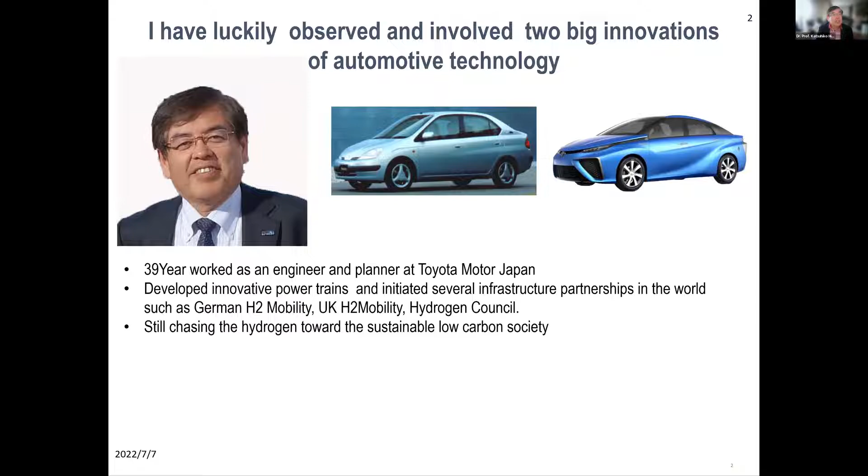Yes, we can. Thank you very much for the introduction, it's a great honor to talk on this topic. As I said, I've been working for years in the automotive sector and also in hydrogen, so I'm still chasing hydrogen toward a sustainable low carbon society. Our goal is not just a decarbonized society or handling the issue of climate change - our goal is a sustainable life. Today's topic is what's going on in Japan, especially for the transport and energy sectors.

Japan's effort for hydrogen is already more than 30 years old, in early stage energy sector and also local emissions - that was a problem especially for a big city like Tokyo. But now, actually, most emissions are not from transport. So vehicle emissions are not very important for Japan to solve the local emission problem. Now the target is changing because hydrogen will be a very important vector for a carbon neutral society and also the green growth strategy.

Historically, Japan led the world in adopting a hydrogen strategy. In 2017, Japan was the only country to have a hydrogen strategy. Now we have many, especially after 2020-21, and even now we have a hydrogen strategy for Saudi Arabia. That's a little bit surprising, but it's because hydrogen is very important all over the world.

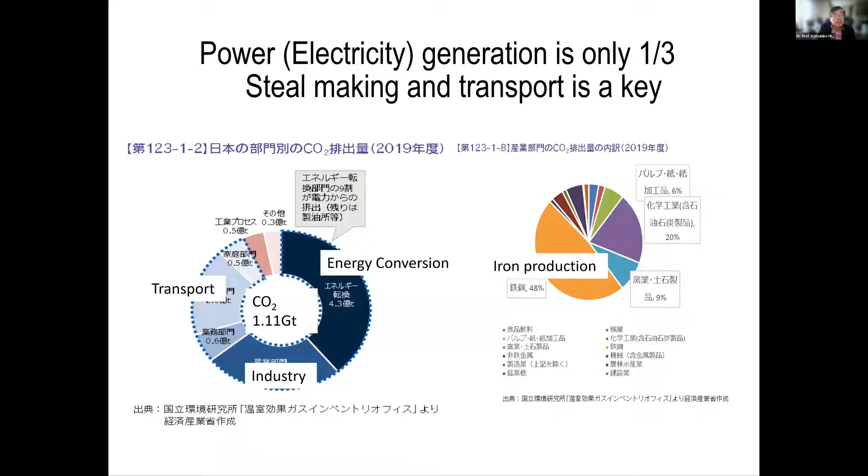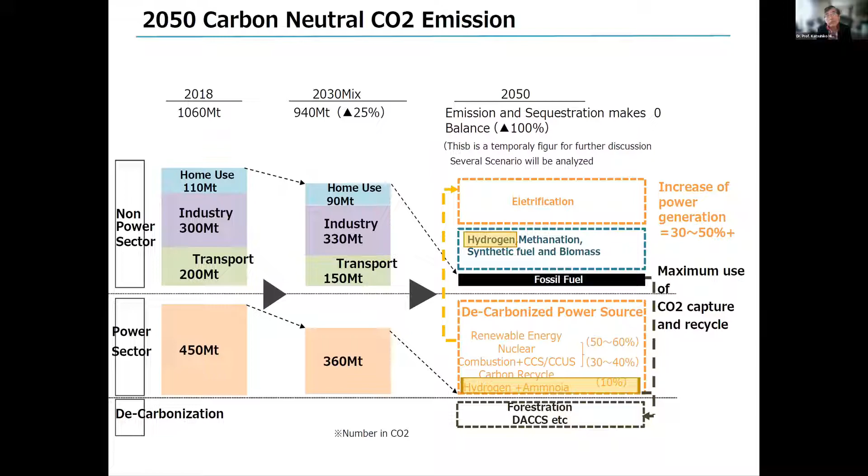This is the carbon neutral strategy of Japan. Currently more than 1 gigaton of carbon dioxide emissions need to go down to 0 by 2050. Japan set the policy first to reduce the cost of hydrogen, then showed a moderate target. But last year, because of carbon neutrality commitments, they set a higher target - but still, compared with Europe and the rest of the world, it's still moderate.

Already for passenger cars, hydrogen price at the hydrogen fuel station is at parity. But to go beyond this, the hydrogen cost needs to be cut further. So this was something the Japanese government used as a strategy.

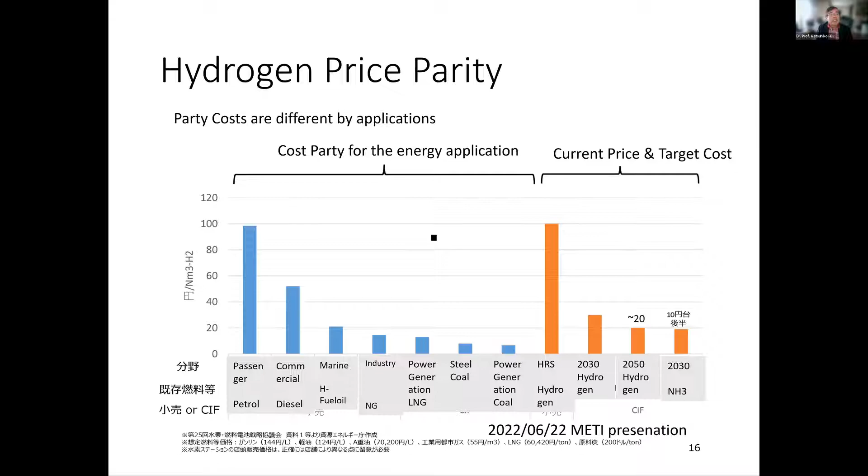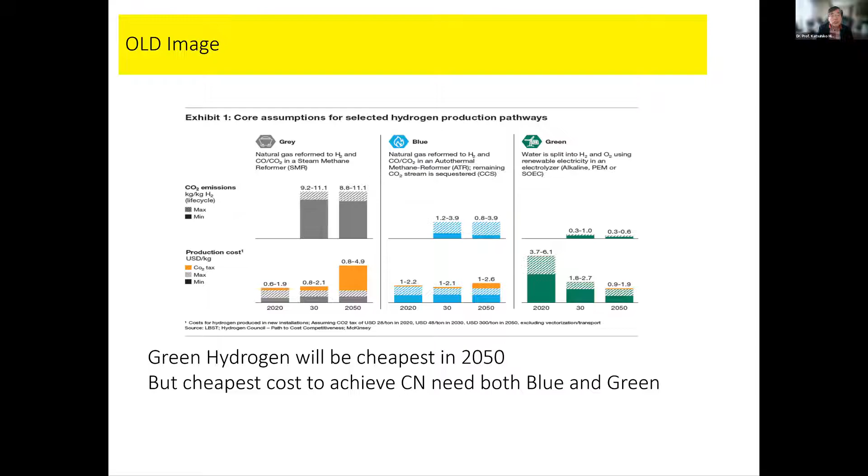But Europe now, natural gas is 167 euro per megawatt hour. That is something like $50 per million BTU. So the equivalent hydrogen price is $6.5. So green hydrogen is already near this figure.

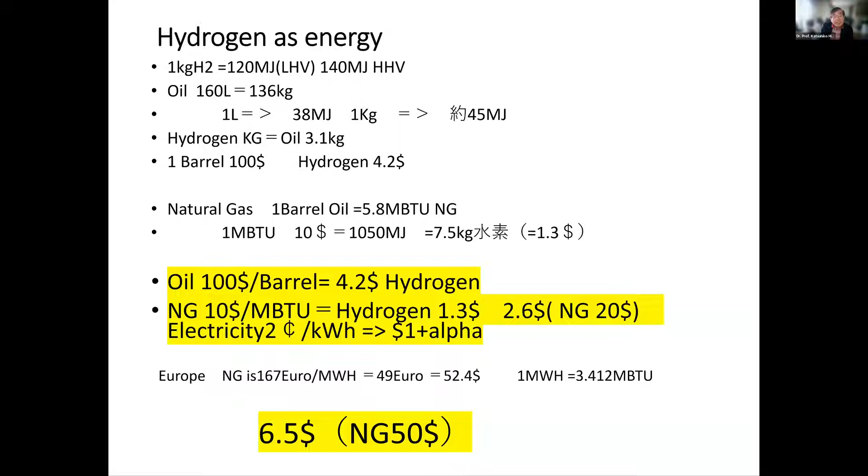On the right is green hydrogen. Green hydrogen is currently more expensive than fossil fuel. Actually, this was when oil was $60 per barrel. With oil at $120 per barrel, with CCS, blue hydrogen is almost the same, or maybe a little more expensive at this moment. But if you see the real value chain of this, the concession is more than half of those costs.

That means when we pay the cash, half the money, or actually two thirds of the money, is not going into the normal economy, like creating jobs or other investment. But in the case of green hydrogen, this is completely different, because the energy comes from PV, wind, and other renewables, and electrolyzers. The cost can be a bit more, but cost means cash flow, and that cash flow will be redelivered to the industry. So economic cost can be better for green hydrogen.

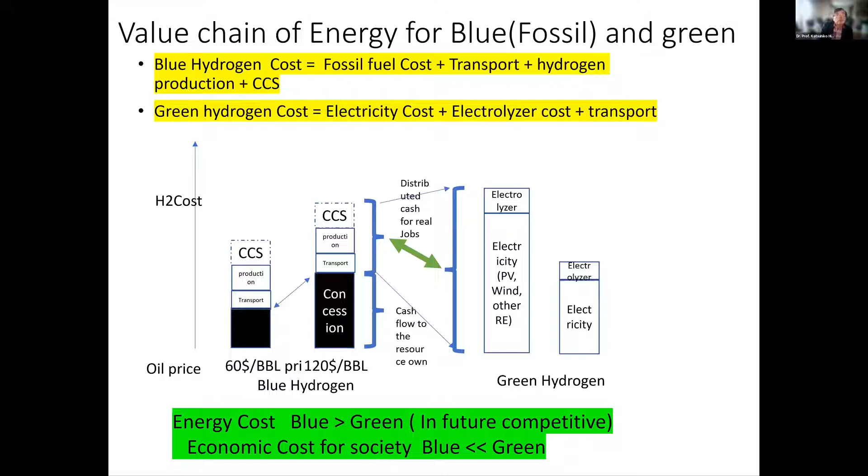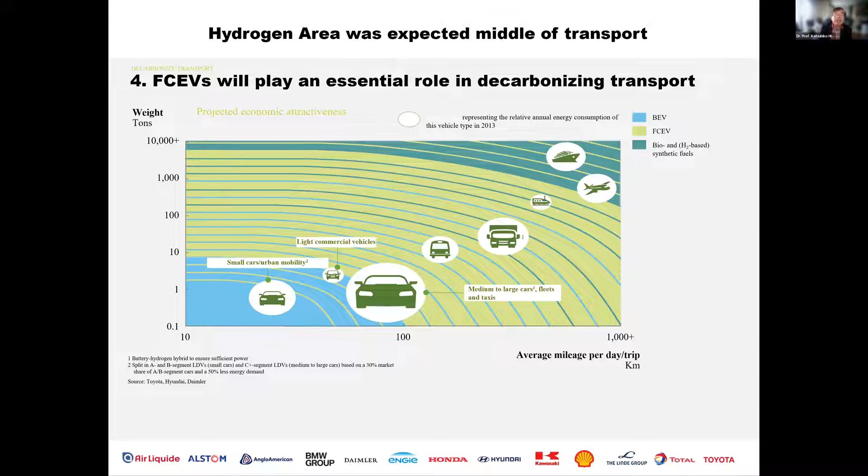So battery or fuel cell is always being discussed. This is a picture I drew during the Hydrogen Council. Smaller cars will be battery electric, longer distance and larger vehicles will be hydrogen. Aviation and ships are a little uncertain. But a very important thing is the distribution of carbon dioxide emissions. Actually, small vehicles are high in number, but the carbon dioxide emission is not so large.

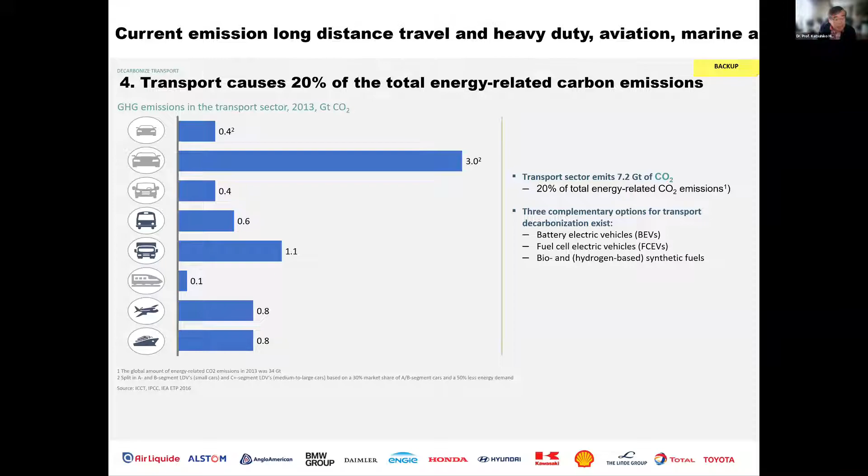So this is the current status of vehicle trends in the world. Small passenger vehicles seem to be battery electric, while mid-size and large are still uncertain. Commercial vehicles, probably heavy duty, are going to FCEV, and others like bus, train, marine, and aviation are actually a mixture with hydrogen. For marine, there may be some possibility for ammonia or similar fuels. But anyway, this is the viewpoint from the emission perspective.

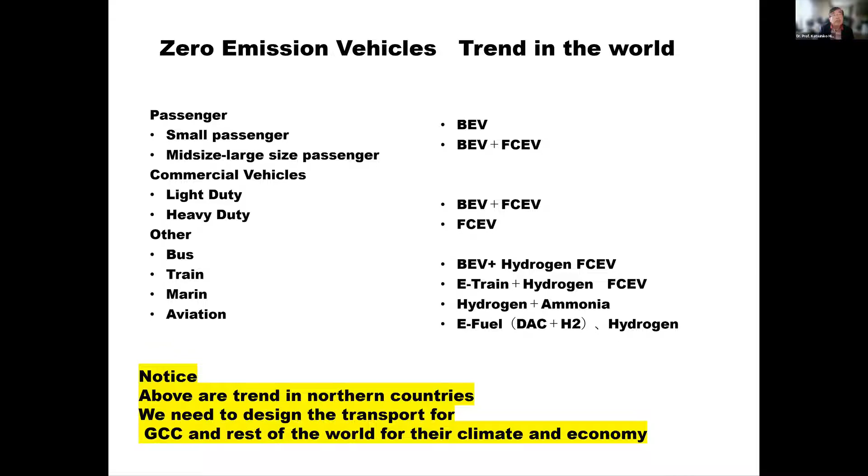I've been working for years in the automotive industry. The priority of fuel choice for the customer is completely different from what we think about on the desk regarding emissions. Fuel cost is just one of many aspects for customers. Customers may compromise on price for comfort or performance, but they are not willing to compromise on convenience.

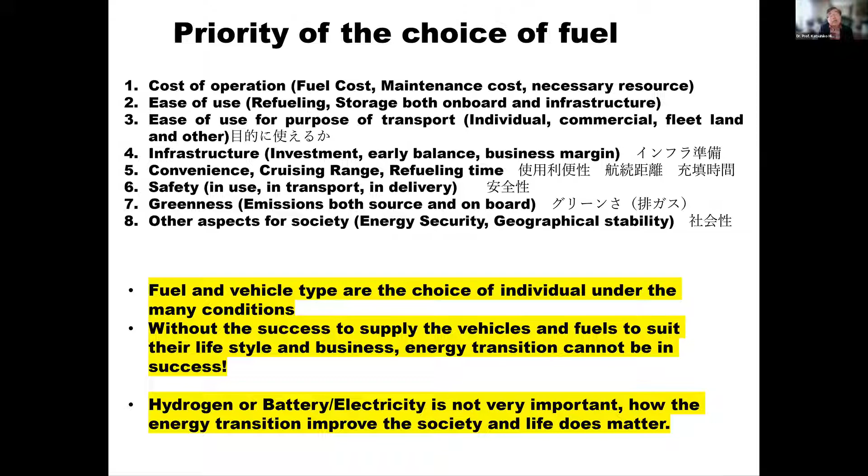So when you think about future mobility, convenience is very important. In this sense, I see hydrogen fuel cell still has a huge chance when infrastructure can be available nearby. This is how we construct the infrastructure.

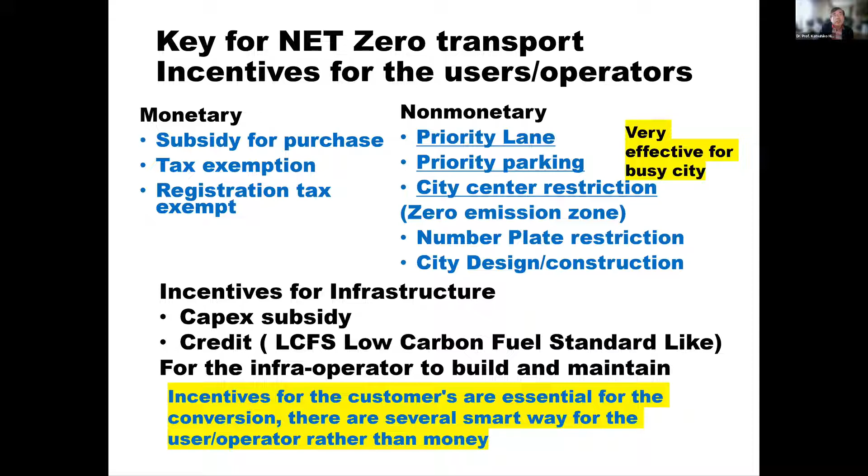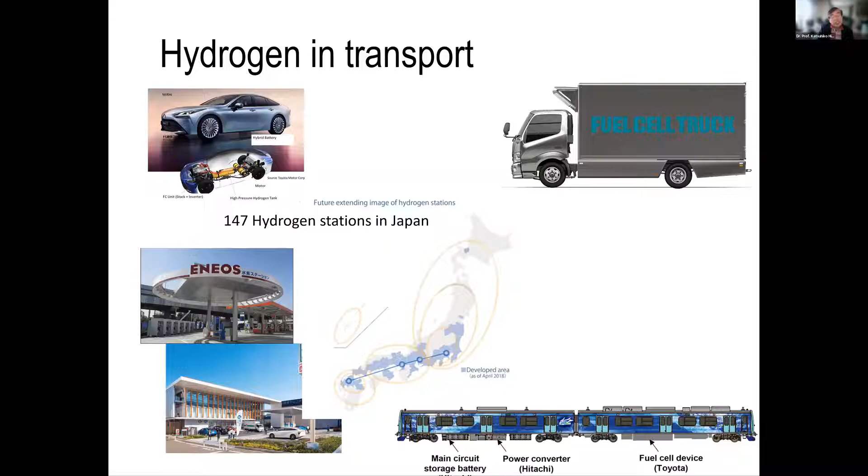So I'm talking about hydrogen in transport in Japan. Now JR, Japan Rail, is thinking very seriously about using fuel cells as diesel alternatives, and also for commercial vehicles.

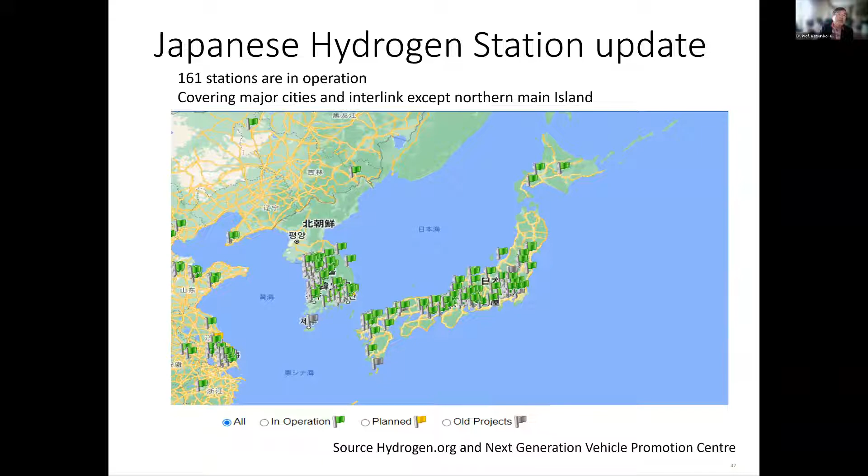This is the current situation of hydrogen stations. Actually 161 stations are in operation, covering major cities and major interlinks, except the northern main island. I'm using a hydrogen car every day, shown in the middle of this picture. Day by day there's no problem, but only when you travel to the northmost or some very remote place do we need to find a hydrogen station.

Some people ask me if Toyota is moving from fuel cell to hydrogen combustion engine because of the recent racing. Toyota's president Akio is very favorable toward auto racing, and he wants an exciting car. Of course fuel cell is exciting, but not only fuel cell—also the combustion engine.

I'm originally an engine engineer, so I know quite well that Toyota is not moving from fuel cell to combustion engine. Toyota's intention is that there need to be many solutions for decarbonization of mobility. Not just electric vehicle—electric vehicle is one solution. We need to think much more, and there's many chances for many applications.

I personally do not think the hydrogen combustion engine is possible for passenger cars, since I've been working on this for years. It's good for racing cars, but not for everyday use.

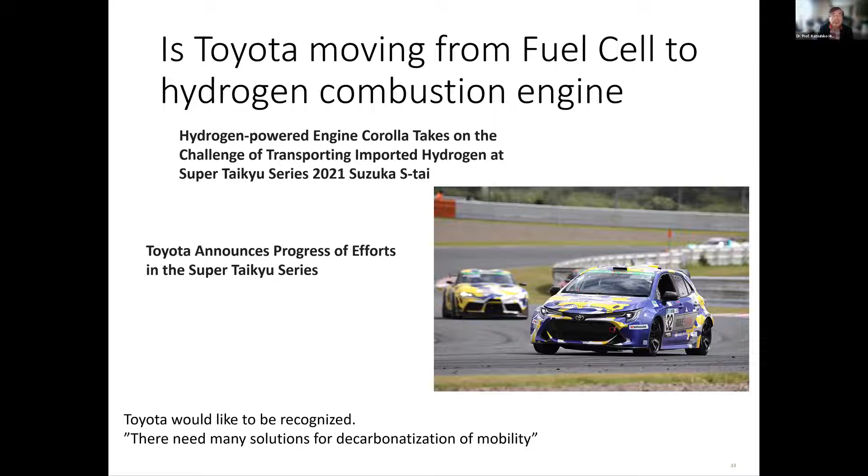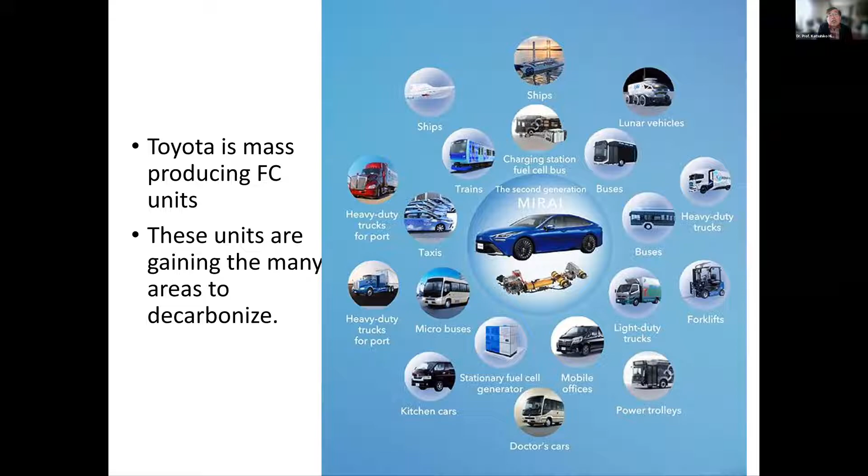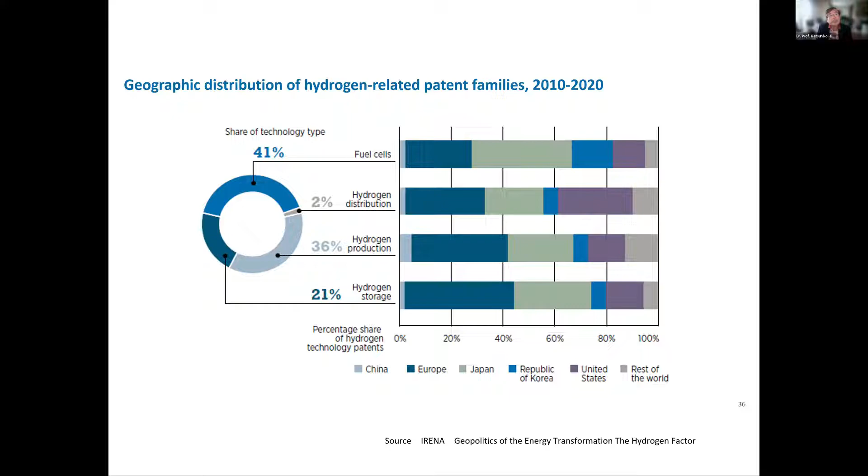In conclusion, Japan's policy was previously concentrated on R&D, but is now shifting to implementation of hydrogen into society, with large infrastructure investments from government and private sector ongoing, along with recognition of domestic hydrogen supply. This is because energy security in Japan is getting more and more serious—the exchange rate has moved from about 110 per dollar to around 135 yen per dollar.

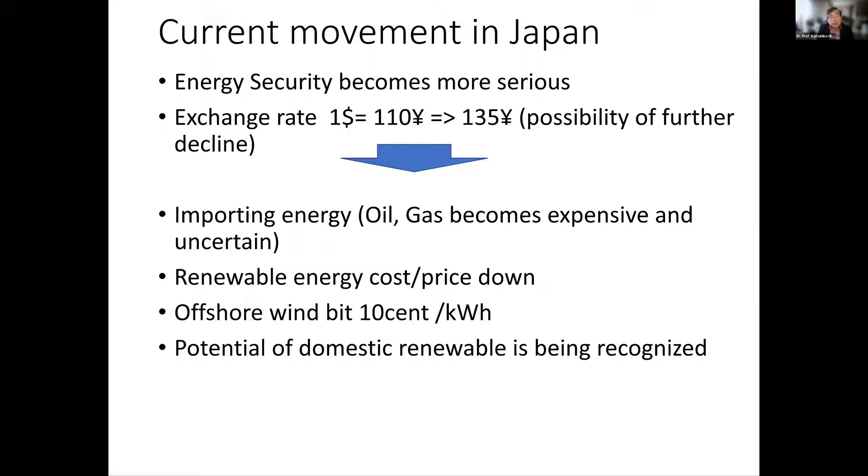In addition to high energy prices, this falling exchange rate exaggerates energy costs for the Japanese economy. Also, renewable energy cost is going down drastically—recently Mitsubishi won an offshore wind bid at around 10 cents per kilowatt hour. This was a big surprise for everybody, but not really, since it's similar to or a bit more than Europe's cost. So the potential of domestic renewable energy is getting more and more important.

I'm personally pushing this because we have huge renewable potential in northern areas like Hokkaido or Tohoku. If you convert that energy into hydrogen and build a pipeline, as Europe is now planning, Japan can use domestic renewable energy as hydrogen, both in central Japan, which may also reduce energy security concerns.

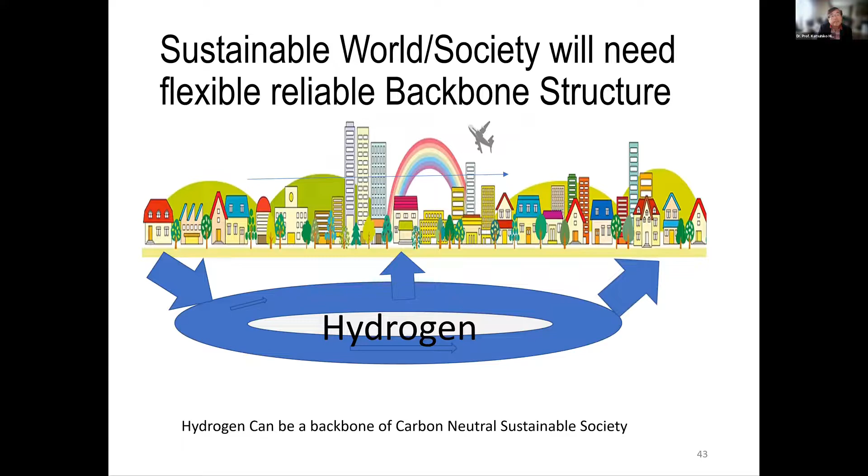And for Japan, in conclusion, the chance of carbon neutrality means we can design the future. Hydrogen can be a basic backbone structure. I like this, and thank you very much.

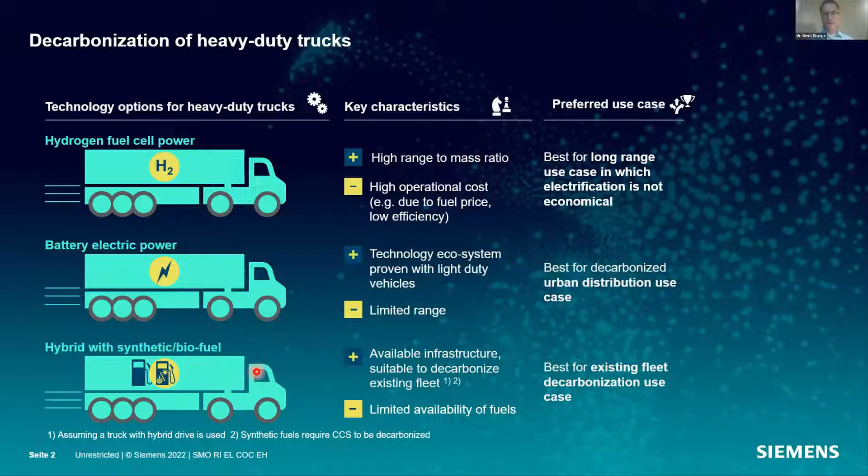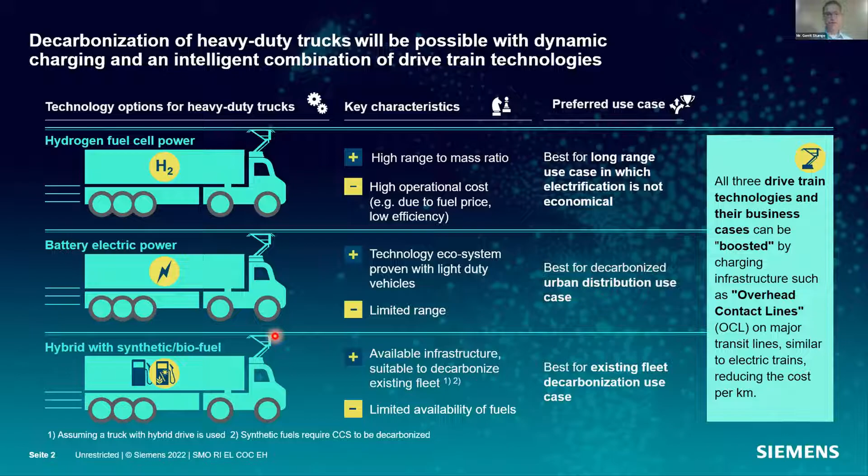If we think about how to combine these rather different approaches, fuels and infrastructure, we at Siemens Mobility have invented something which has been known for decades in railways, and this is overhead catenary. If we think about combining these rather different trucks within a collector, which we call a pantograph, connecting to wires, we see not only direct electrification, but we add a very high efficiency to those trucks using this.

And why is efficiency playing such a dominant and important role in this sector? I'd like to draw your attention to the outcome of a Fraunhofer study done some years ago. If we talk about TCO, the total cost of ownership, from the view of the owners of infrastructure but also from the perspective of the hauliers and logistics, it's possible and necessary to split up this TCO into some important parts. This is the energy supply for one piece, then the energy infrastructure cost, and also the purchasing cost for a vehicle, making up the total costs.

Fraunhofer made a very interesting assessment for renewable fuels or synthetic fuels, the overhead catenary, and the fuel cell electric vehicles. Again, this is all for trucks here. And it is clearly visible that it is not about the energy infrastructure. If we compare these, it is rather the energy supply. So TCO is mainly driven by energy costs. And this is worth looking at, where you get your energy from and what it costs you as a haulier.

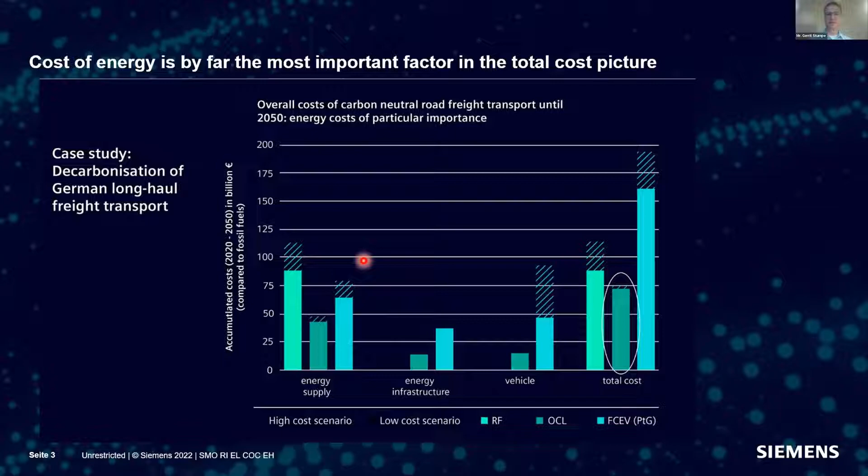So at Siemens Mobility, we started, as I said, already 12 years ago with some initial testing on our test facility near Berlin in Germany. We tried to bring up such a collector on top of a truck and also even on the tractor trailer, which is the so-called working horse in the trucking industry. And we proved it's really working.

We also made demonstration tests in the US with different propulsion systems. We also went to Sweden to test the system under wintery conditions, the very first time in daily operations for local hauliers and transport companies there.

And then we made our first attempts on German motorways just 3 years ago with this truck here using a third generation pantograph. Since July last year, we made a cooperation with Continental, the leading automotive first-tier supplier in Europe, in preparation for the industrialization and mass production of these pantographs.

So this solution uses wires, direct electrification, and offers all the advantages a haulier needs. The system is very flexible, so you can connect and disconnect at any time and at any speed. Thanks to your battery, onboard or secondary engine concept, you can also make your way outside the electrified section.

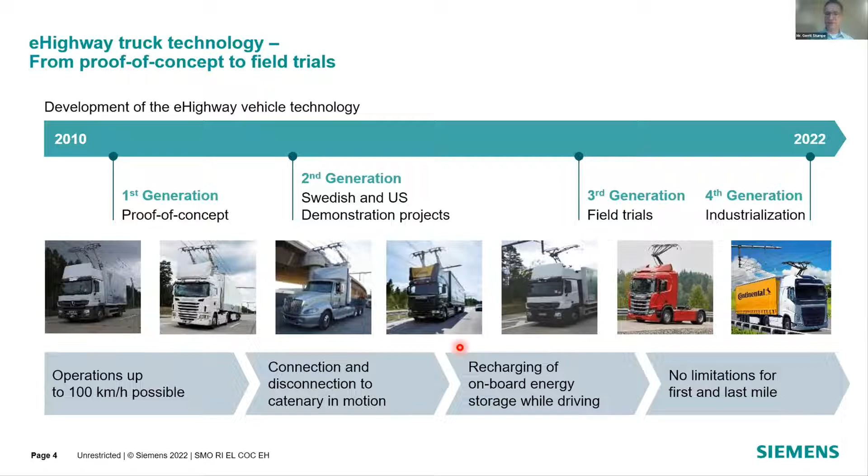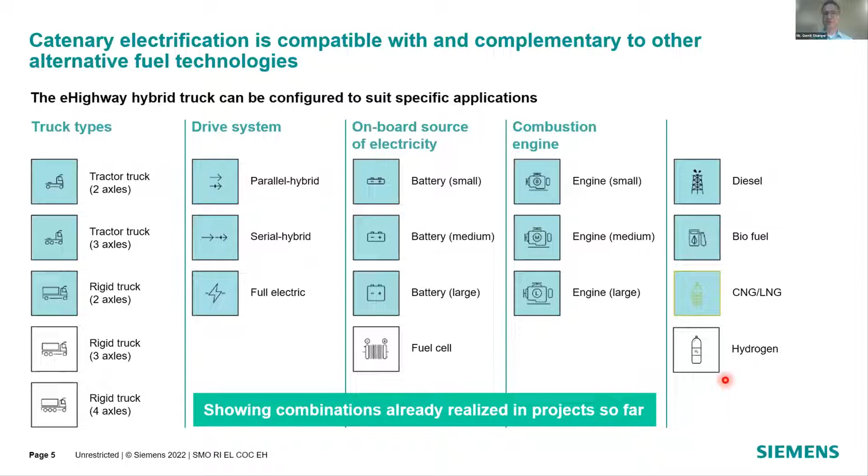The only one still missing, which we are eager to test, is of course the fuel cell and hydrogen in combination with the pantograph. So following Germany's approach with the help of the German government,

we set up 3 field trials to test this system out in daily operations on public roads. We chose 2 motorways, one near Frankfurt on a 5-kilometer stretch, and another 5-kilometer stretch near the Baltic port of Lübeck, close to Hamburg. And then in the southwestern part of Germany, on a very curvy valley federal road, 3.5 kilometers.

All of these use 5 hybrid trucks, with a diesel engine and an electric engine. This is a parallel hybrid concept, receiving electric energy directly from the wires. We've also started extension works near Frankfurt with another 7 kilometers in one direction and more than 7 trucks to follow.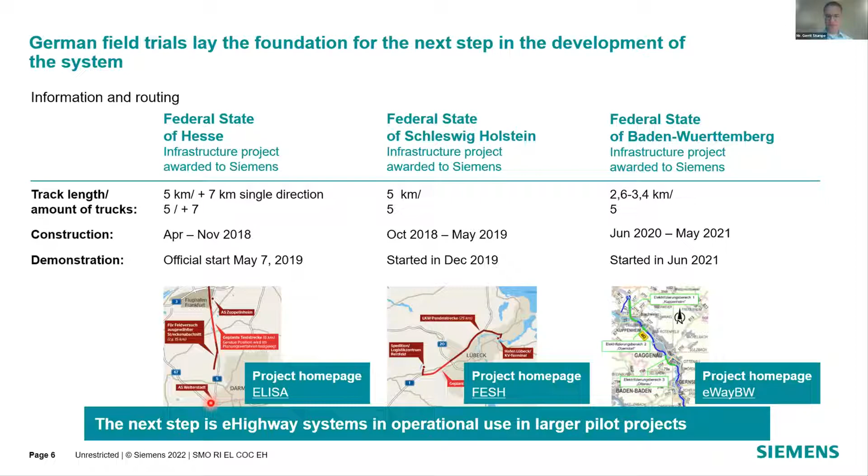All these works were done without interruption of the running traffic, because the motorway operator near Frankfurt said this is such a busy road—150,000 cars and 15,000 trucks per day passing by—that it would be really hard to do any interruption for construction works on this specific section.

We had some temporary closure of the roads during weekends or Saturdays, when we mounted the cantilevers, then drew and pulled the wires and fixed them. Next to the motorway, at a service station, we erected and installed the substation and connected it to the infeed masts, providing in this case renewable power to the trucks driving there.

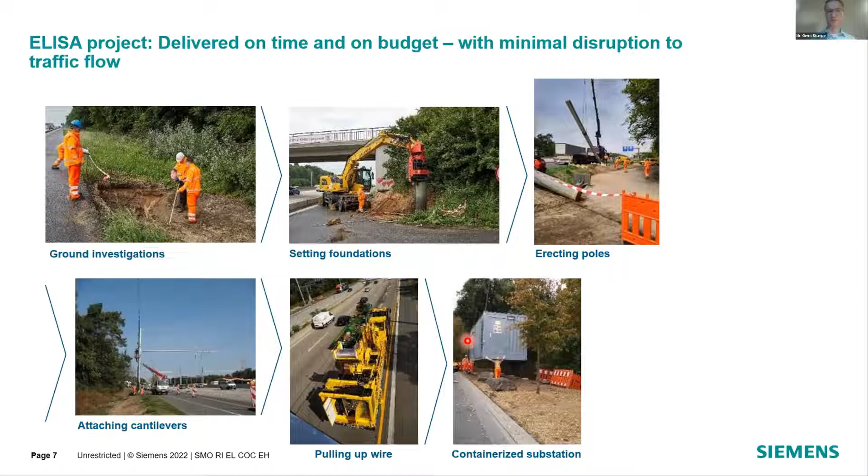These are all nice efforts, clearly showing that this technology really works under daily, ordinary conditions. But it needs federal or governmental help and support. Thinking about the transition to an emission-free trucking world, Germany's government decided to choose a technology-open approach, and with our system, which we call the e-highway, we are very confident to meet this.

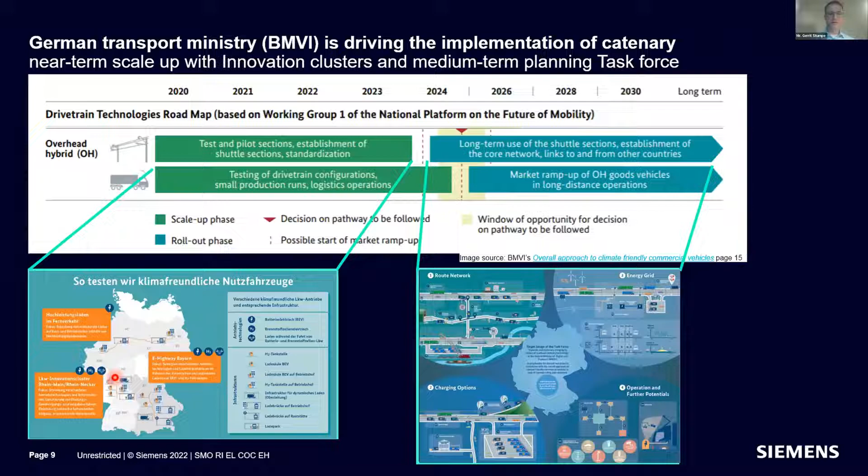The ministry also highlighted starting 3 larger projects: a battery electric one with mega charging systems, and then 2 innovation clusters in Bavaria and in the southwestern part of Germany, where overhead catenary should be used as an energy backbone or energy carrier, serving trucks that are full electric or hybrid using hydrogen as a future fuel, combined also with hydrogen fueling stations.

So thinking of this solution, or any solution, it needs to be done in a harmonized, European way. This is why my colleagues in engineering are working on an open standard, expected by the end of this year. Beyond this standard, there's very high interest in this technology and approach from many European states, showing they would like to do feasibility studies, or have already done so with promising results, or are even eager to set up electric roads and overhead catenary themselves.

To sum it up: the overhead catenary solution for trucks, namely dynamic charging, combines all the advantages we already know from railways for decades. We also have an industry in place capable of meeting this demand and building this on roads. It can be realized in an international context, not only a European one. It is fully flexible and compatible with other fields and technologies. It's the most economical one, and it can be quickly rolled out. This is very important in order to reach climate goals by 2030 and beyond.

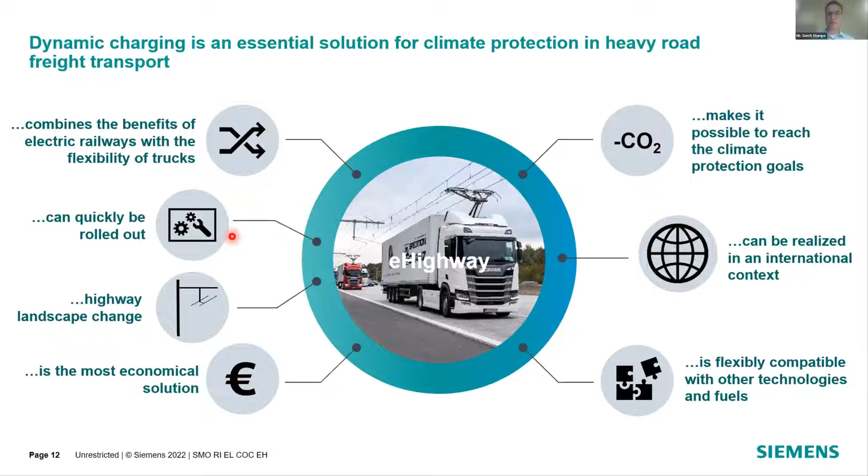Having said this, I would like to draw your attention to these 2 fine movies we made, where you can see this system in operation, if it's not possible to come to Germany and see it for real. I'm really happy and looking forward to any questions. Thank you very much.

Hey Gerrit, my screen is freezing. I wonder if you have finished your presentation? Yeah, I'm about to finish. Finished already? Oh yeah, sorry, my line was dropped.

Yes, of course, and thanks for raising this important question. It's all about infrastructure, and infrastructure always needs to come first before any possible technologies placed on vehicles. Coming specifically to the costing question, there have been assumptions made by many studies, not only German studies, but also European and international studies. It shows there are some slight differences among countries, as this infrastructure mainly uses steel, which is driven by commodity costs. Studies show that before the conflict in Ukraine at least, the price per kilometer should be around 2.5 million euros per kilometer, serving both directions.

Yes, and also a follow-up question regarding the cost of hydrogen itself. So any estimation on the price in the coming years, and for the e-highway, are you using liquid or gaseous for your vehicles, and how do you tackle the refueling challenges and maybe related safety challenges? I was most afraid of this question, but thanks anyway for raising this.

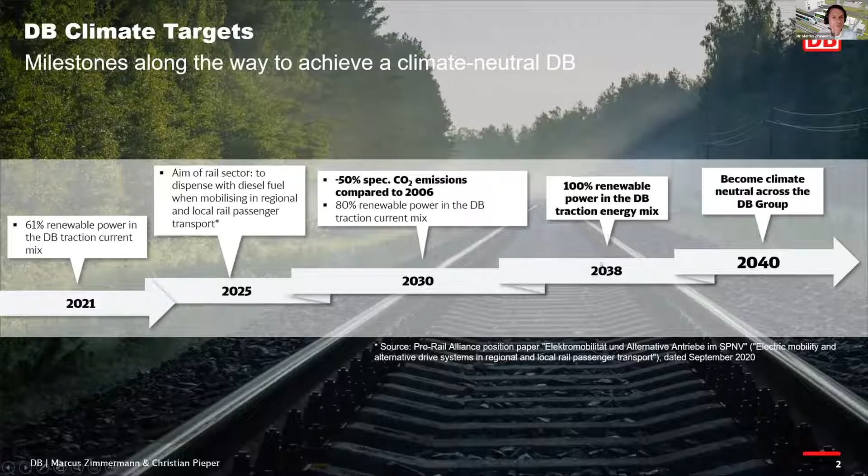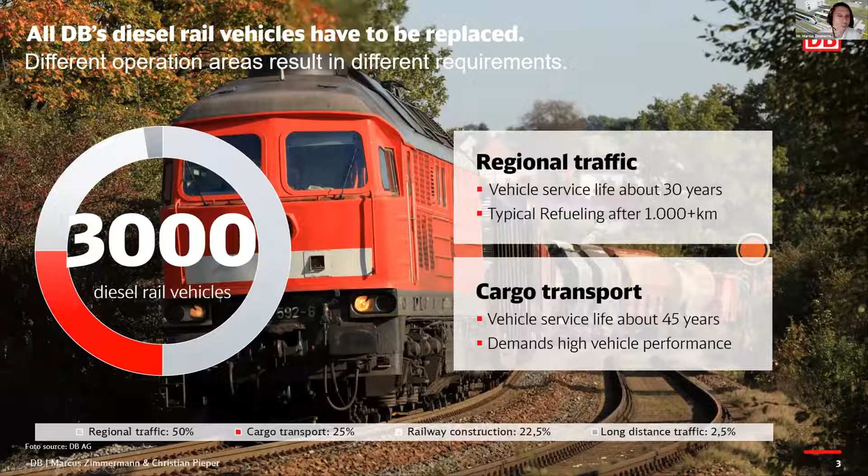So we're talking about biogenic fuels like HVO or synthetic e-fuels. They will be a supplement, especially for high load traffic, and can be used as a bridging technology for existing vehicles which are still in service for quite a while. However, currently the alternative fuels are very rare on the market and so quite expensive. But we are running projects as well to test those fuels during operation, so durability and as well the economical side.

If you think about more range, then fuel cell vehicles come into play. They require two technologies, a battery and a fuel cell, but they can cover ranges up to 600 and in the future even more, 800 to 1,000 kilometers. They store the renewable energy in form of hydrogen on the vehicle. However, due to the two technologies required, they are more expensive, and they require a hydrogen infrastructure.

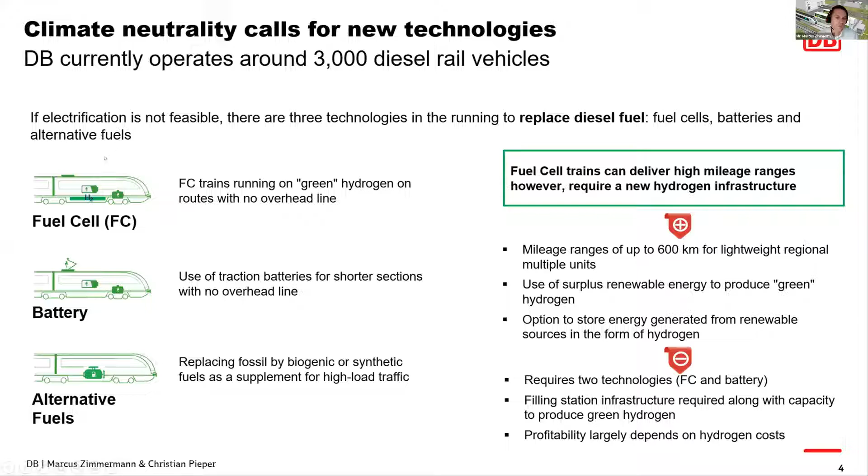So to make a new technology like a battery fuel cell vehicle ready for the market, you need to test durability, you need to challenge profitability, and you need to see the vehicle during daily operation and under all circumstances. So what we are looking for is an implementation of a whole ecosystem. That means the vehicle and the required infrastructure in terms of hydrogen supply and vehicle maintenance.

Furthermore, to ensure climate neutrality, we need to be using renewable energy, and we are looking for an on-site production of green hydrogen with our project. So in quick summary, H2goesRail, our project, is implementing a solution that utilizes green hydrogen and therefore can support achieving the climate targets at Deutsche Bahn. With that, next slide, we take a closer look at the project.

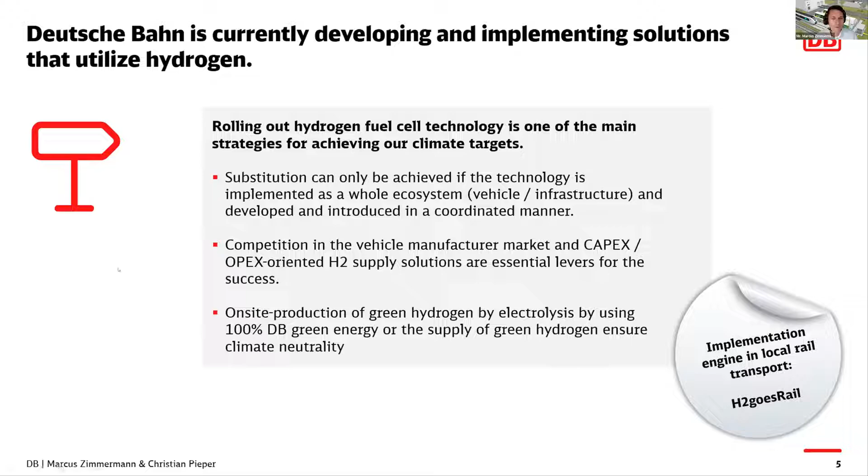The green hydrogen will then be stored at the filling station. And the filling station is capable of fast refueling the vehicle, approximately in 15 minutes. The vehicle will be in operation for 1 year, which then includes the maintenance of the vehicle.

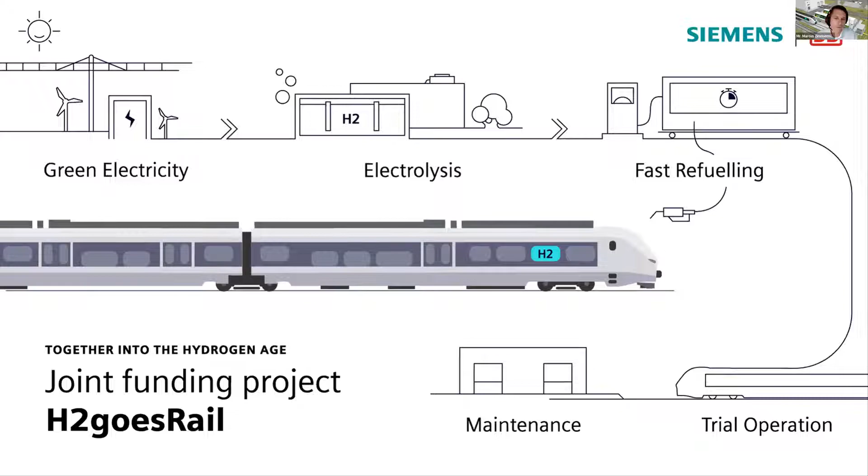Okay, next slide. So some key facts of the project. We are a funding project, financially supported by the government via a program which funds innovative hydrogen projects. In total, we have 4 project partners. First, the Deutsche Bahn Holding, in concrete the technical area where I am working, responsible for the overall project lead and project management, and as well support with experts coming from the alternative drive area.

Secondly, there's DB Regio, the regional operator from Deutsche Bahn, who is responsible for the 1 year of operation and maintenance. Third, it's DB Energie, the energy supplier from Deutsche Bahn, who is responsible for the hydrogen infrastructure in our project. And last, we have Siemens Mobility as our external partner, responsible for the development of the vehicle at the end, making it homologated for the track.

Our project started at the end of 2020, and we will continue until early 2025. And the 1 year of operation is in 2024.

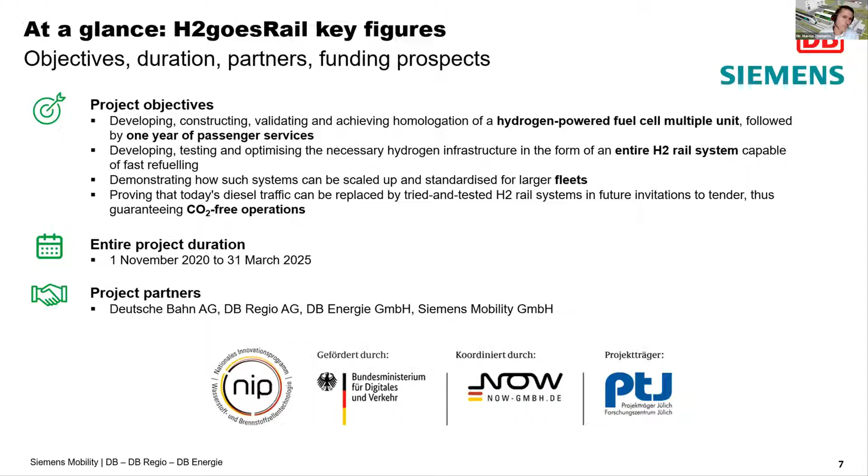Next slide, please. A quick look at the vehicle, some more details. It's the so-called Mireo Plus H. It is a new vehicle based on an electrified platform, so that Siemens can ensure the hydrogen version will have a comparable performance to an electrified vehicle. The mileage, as stated before, is currently estimated up to 600 or even 800, and it is capable of fast refueling.

There will be as well a version later on which will cover more range, up to 1,000 kilometers. From Deutsche Bahn side, we support Siemens during the development of the vehicle to ensure that it's optimized for the operational requirements.

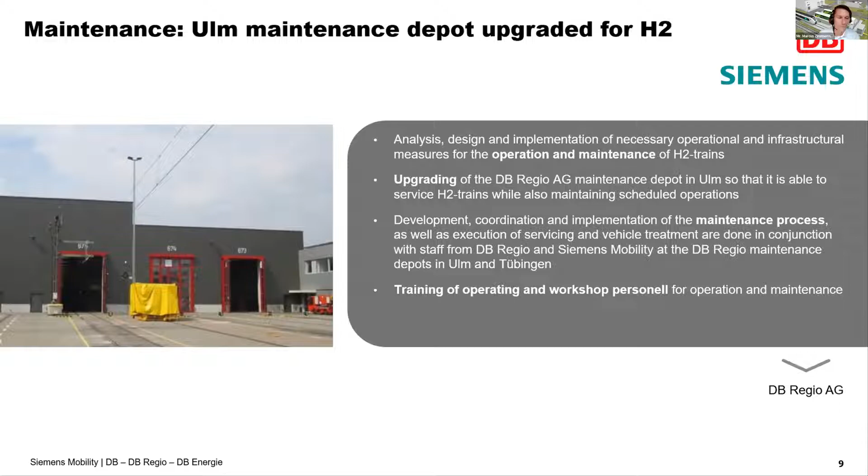So this makes the construction of an overhead line for this topography quite unattractive, we'll say very unprofitable.

During the 1 year of operation, the vehicle will run approximately 120,000 kilometers, and during that time frame save approximately 330 tons of CO2, as it will replace a diesel vehicle which is currently running on that track.

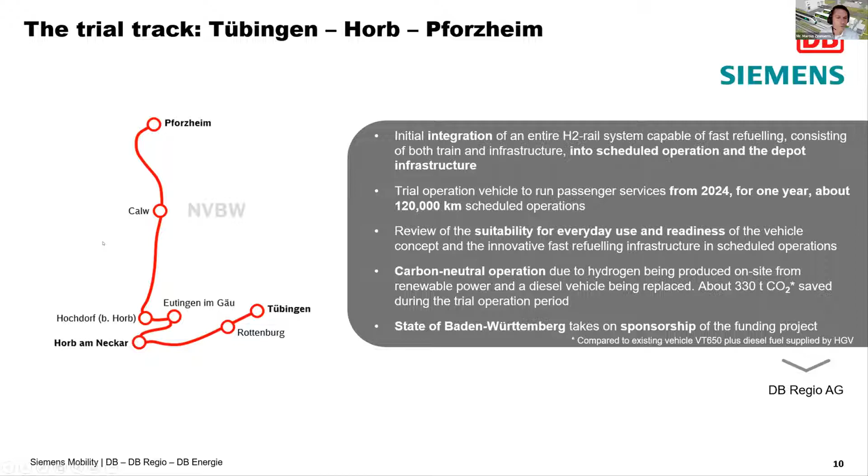With that, I'm leading over to you, Christian. You can start with a more detailed look at the hydrogen infrastructure.

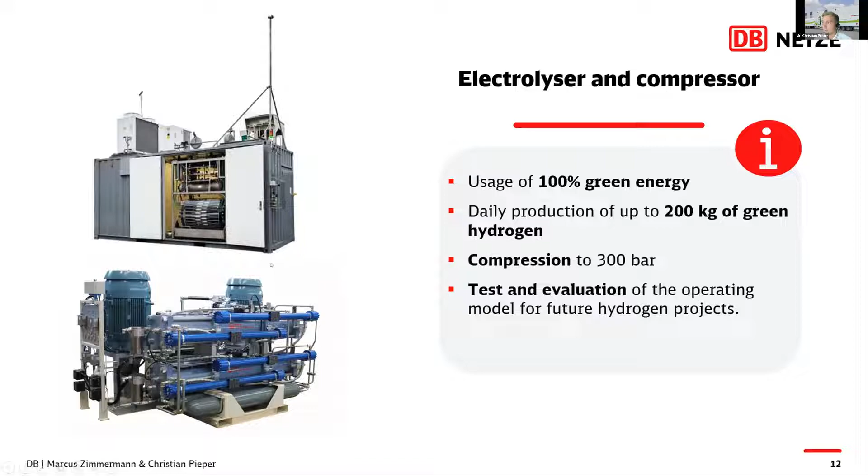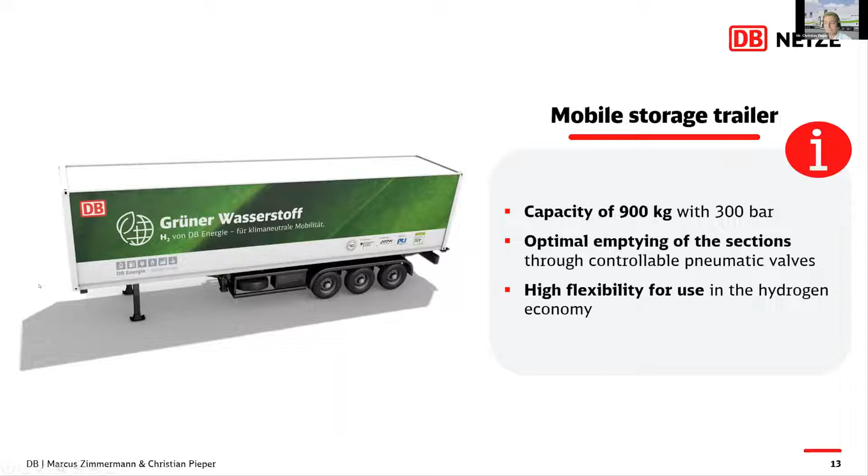The last unit in our concept is the mobile refueler. The mobile storage trailer is connected to our mobile refueler. From there we could get the hydrogen out of the storage trailer and, via the mobile refueler, refuel the trains.

The mobile refueler is the first mobile and flexible refueling station on wheels for the railway sector, but we can also provide hydrogen for buses and trucks. In one refueling operation, the refueling quantity is about 180 kilograms.

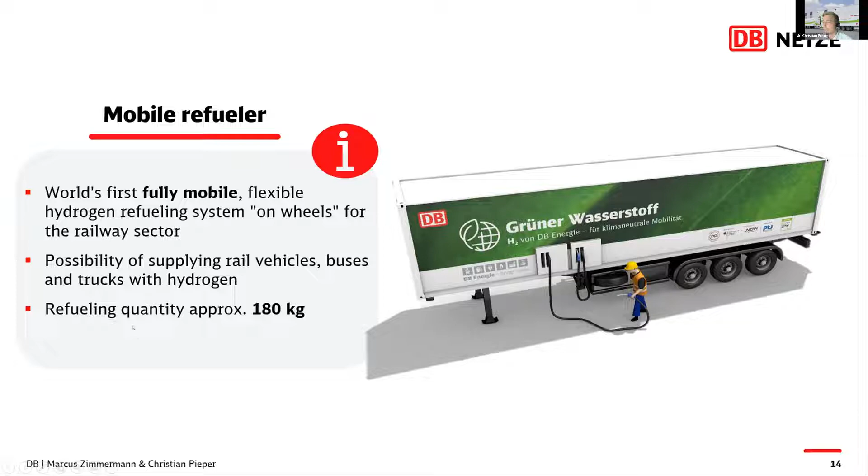On the next slide, I come to the last innovation in our project: the communication interface. This newly developed wireless communication interface works between train and infrastructure. The exchange of data sets on pressure and hydrogen is possible via this interface, reducing energy consumption and refueling time.

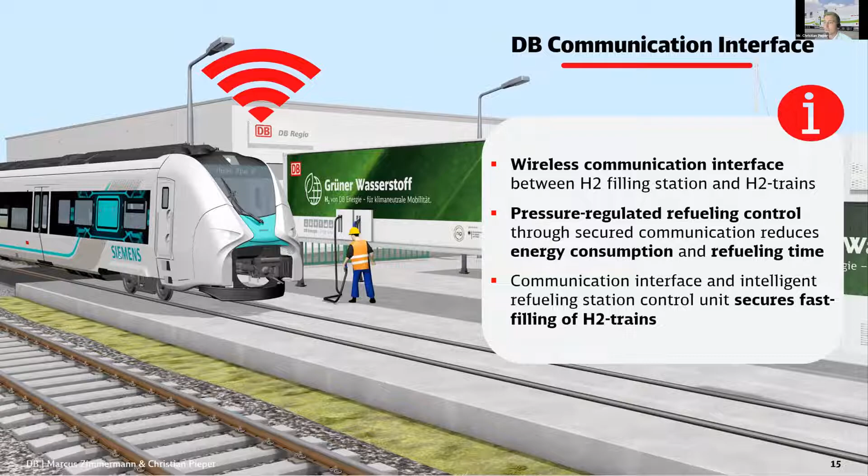So I will come to the next slide. Here we had planned our commissioning and test refilling in mid-2022. Now we have started the commissioning in the test center of Siemens Mobility. There we test our hydrogen delivery concept and supply concept, and want to check and optimize the whole system.

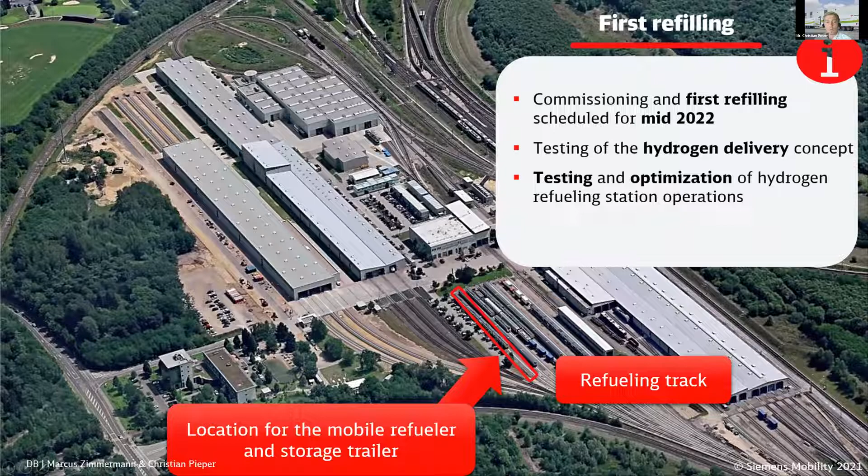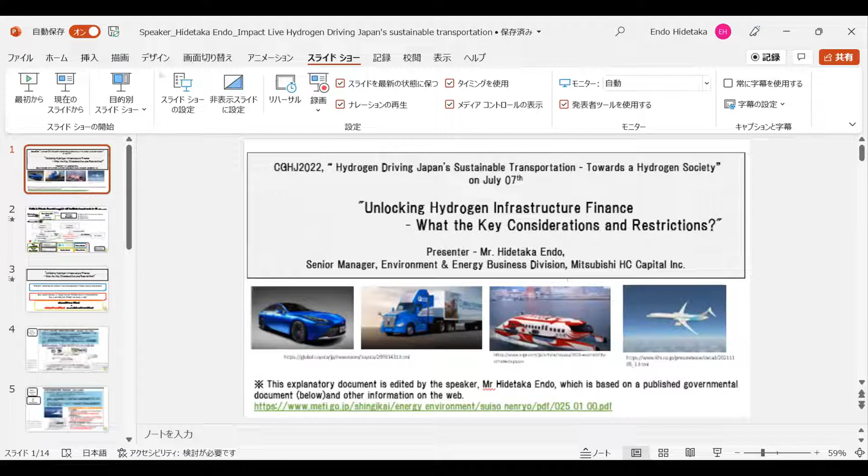May I share my presentation PowerPoint? I want to control my slide by myself. Please share the slide. Can you see my slide? Yes, I can see the slides. Can you see my slide? Yes, I can see the slides, but it's not in full screen mode. Yes, now I can see it.

So about finance in Japan - Japan started the hydrogen infrastructure business around 2015. Toyota released the Mirai FCV, and Toshiba released the H2One automatic green hydrogen energy system in the Japanese market. So since 2015, Japanese markets understood the financial scheme, and private and public sectors have collaborated on constructing a suitable finance support scheme. I think it is on a pretty good level, and it will develop further in the future based on market needs.

And I want to explain the outline of the Japanese finance support scheme. At first is technology innovation. Japan has good innovative technology about hydrogen, especially in transportation.

Last year, 2021, the Japanese government established the Green Innovation Fund. The fund size is 2 trillion yen, equal to $10 billion US dollars. Such a Green Innovation Fund supports developing and facilitating hydrogen technology, including transportation. This supports 19 projects, and among these 19 projects, there are 3 transportation hydrogen projects: one is smart mobility energy management, two is hydrogen airplane, and three is hydrogen and ammonia ship. I will explain more after that.

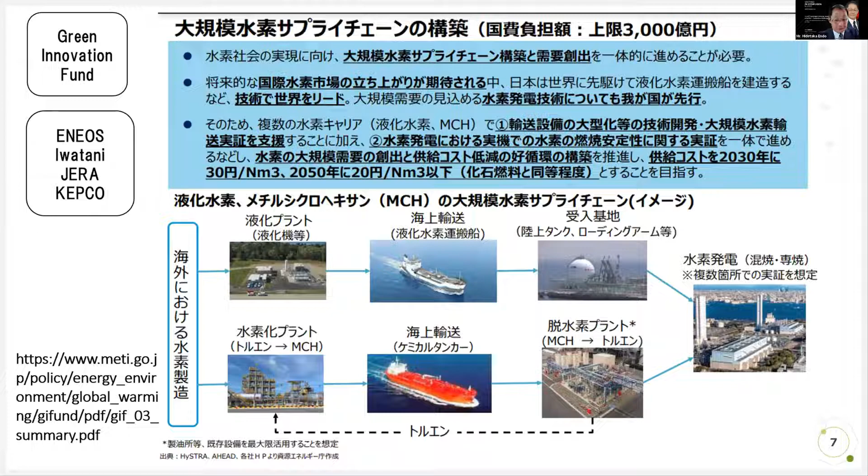So Japan will explore low-cost transportation methods for hydrogen, and we will suppress the hydrogen cost around 2030 or so. We will realize 30 yen, meaning 0.22 US dollars per normal cubic meter, will be realized by 2030, I believe.

Those are public financial support issues. And next is the private sector's challenge.

Since 2014, Japan's Toyota released the Mirai FCV. Now about 4,600 FCVs have run in the domestic market, but the Japanese government target is 40,000 FCVs. We have not reached that yet.

Why can't we reach the 40,000 FCV level? It's due to the lack of hydrogen supply stations. The Japanese government aims to increase hydrogen supply stations to about 1,000 sites by 2030, but now there are only 162, and only 159 are operating.

Japan needs to leapfrog to increase hydrogen supply stations, but there are problems with capex and opex. Hydrogen station cost is about 400 million yen, nearly equal to 2.96 million US dollars.

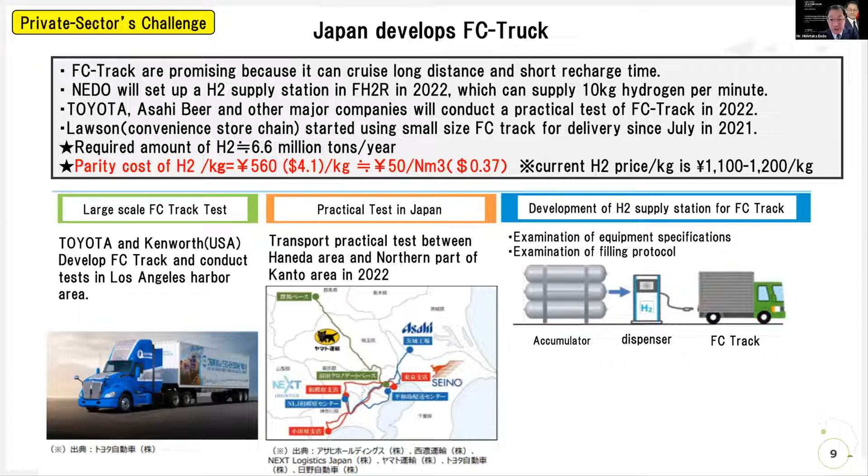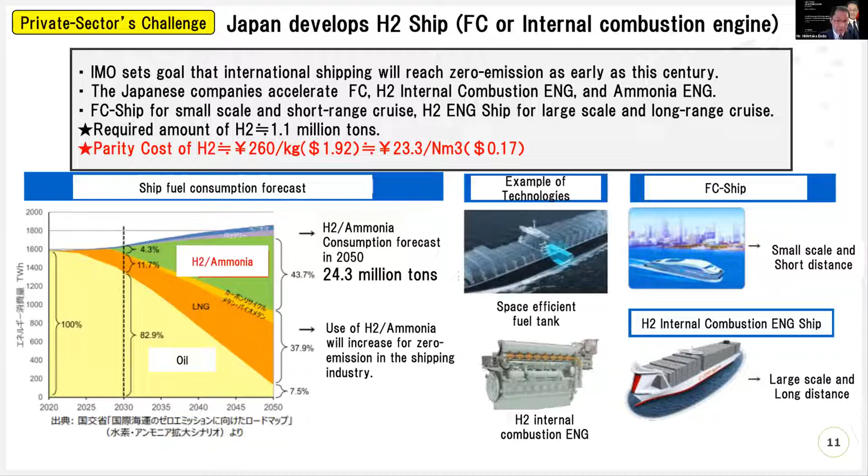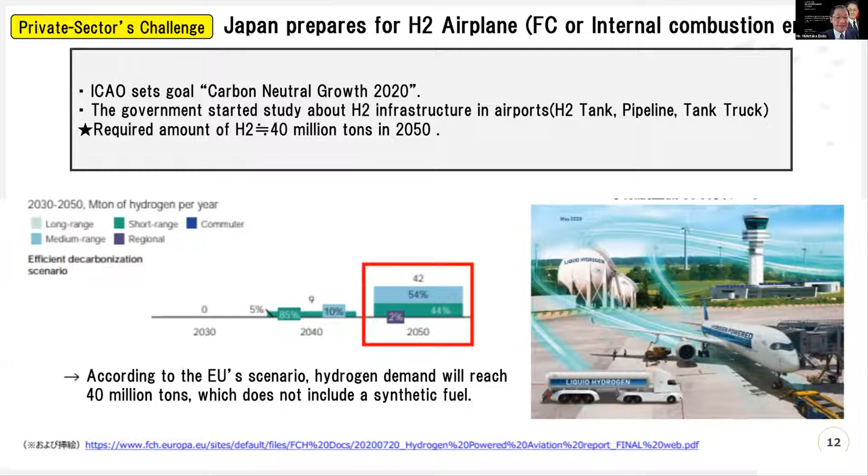Sorry, too long a story. So Japan is making efforts, and we will prepare. We have a finance support scheme.

So the most shocking point is off-takers' motivation to induce hydrogen transportation infrastructure, overcoming the capex and opex. We need more efforts focused on cost reduction of hydrogen equipment and hydrogen production cost itself.

That's all. Yes, this is the Japanese hydrogen business conditions. Okay, Mori-san, moderator, it is the end of my explanation. My explanation is finished.

Thank you so much, Endo-san. Thank you for sharing all these statistics, which is very valuable. I also appreciate your kindness in converting the Japanese yen into US dollars, so the audience can understand the situation.

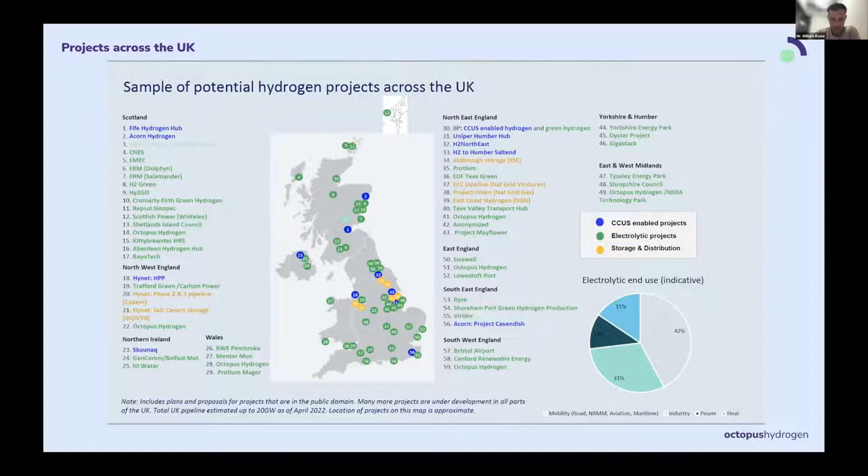So jumping into the real detail of my presentation.

So just so it's clear, we provide green hydrogen as a service. We speak to truck or vehicle operators of what we call captive fleets, fleets that refuel at their depot every day. Our model is to take hydrogen production equipment, such as an electrolyzer, and connect it to renewable resources directly. This avoids some of the costs of production, and also uses some PPA-backed power from the grid.

We then deliver the hydrogen in tube trailers to our refueling station, and then run the refueling station. The refueling station is always designed to be private, so it's not open to the public, we keep it only open to the vehicle operator.

The reason for this is twofold. One, it lets us design the scale of the refueling equipment to be suitable for the number of vehicles, so we don't have to handle surprises in volume. The second is it means we can understand the vehicle specifics and the fill rate specifics. We're not looking to have lots of gas at 700 bar if the vehicles are only 350 bar, but vice versa, if the vehicles are 700 bar, we need suitable cooling in place and additional storage, etc. So it lets us optimize and keep the costs down.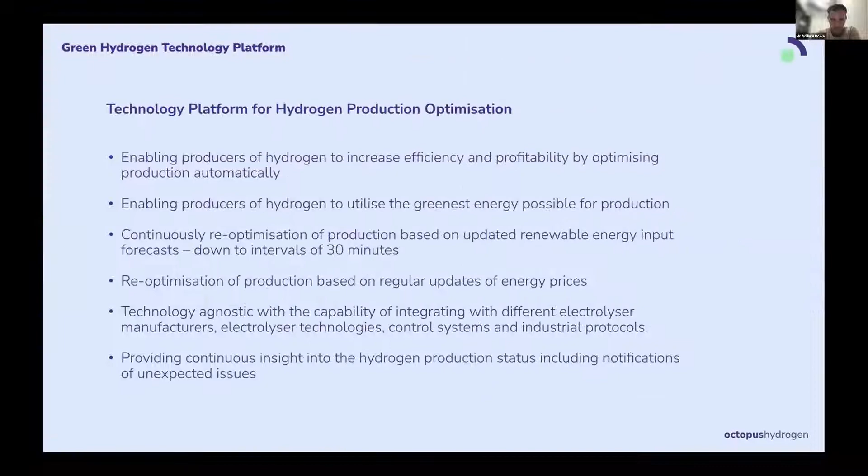We also act as a green hydrogen developer. One of the things we found is that lots of customers come and buy hydrogen from our sites themselves in their own tube trailers, rather than requiring us to deliver the hydrogen through to them. We also have a technology partner to optimize this hydrogen, but I don't think that's particularly relevant at this point.

So this is jumping into the specific solution we're deploying in the UK now. We have a 20-foot and a 40-foot ISO container that contains hydrogen storage cylinders. The beauty of this system is that it also has a clever set of cascade refilling capability, so actuated valves and a technology interface, and also a fueling interface, so that we can take the hydrogen to our customer's depot and allow them to fill without requiring the build of a dedicated hydrogen refueling station.

This means someone can start with 5 HGVs or trucks and start working from tomorrow without needing to build an HRS. Now, as the volumes increase, so as the number of vehicles increase, this solution becomes somewhat redundant because it's inefficient to transport the gas and refueling equipment every time, and it makes more sense to have an HRS plus with delivered hydrogen.

But this is a real unlocking capability in the hydrogen market in the UK, because for all the different trials and operators that want to adopt and learn about hydrogen vehicles, we have a low-cost solution that doesn't require a long implementation period and doesn't require a large capex investment per customer with a long payback period. So this really opens the door to allowing lots of different potential use cases to start with hydrogen.

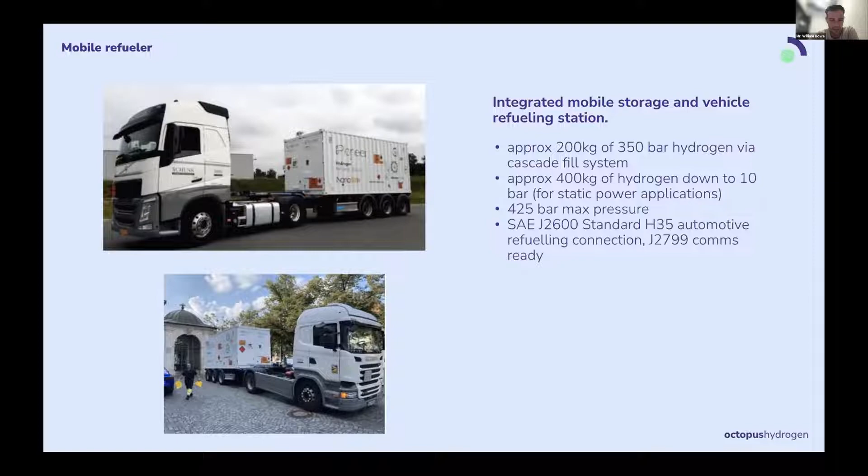But we also offer the solution without the complex cascade filling, and we'll just do a straight tube trailer process. This is for applications such as auxiliary power or diesel generators, where they don't need the 350 bar, they only need 10 bar hydrogen, and we just use the application as a straight tube trailer, for example.

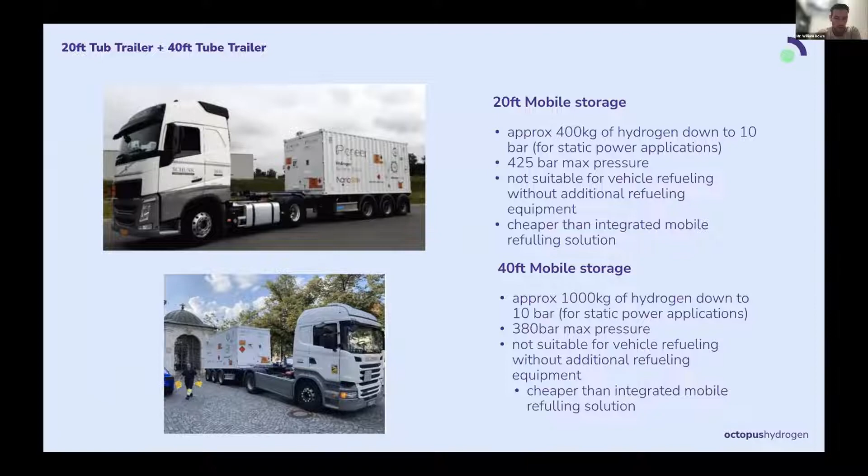So that was all of the content I was going to provide at this point in time, and I was hoping that we could then go into questions.

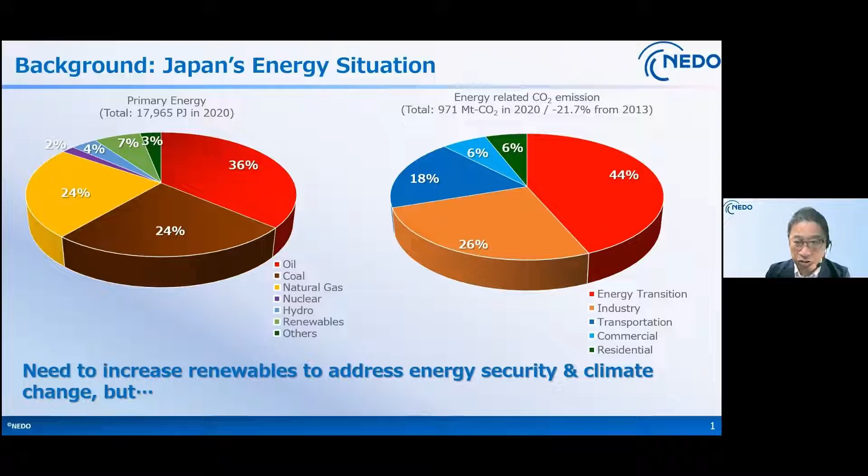For Japan's policy update, Japan declared our energy and environment target: net zero carbon neutrality by 2050. To achieve this goal, Japan, mainly through METI, has provided several policy measures.

One of the big events is funding. METI formulated the Green Growth Strategy as well as a national strategy, establishing the Green Innovation Fund, approximately $19 billion, to accelerate several technologies for carbon neutrality, including large-scale hydrogen transportation, hydrogen power generation, renewable hydrogen, maritime and aviation, and steel production.

I'd also like to mention Japan's energy policy for 2030. Japan unveiled a new energy mix in 2030, increasing renewables while still keeping nuclear. The new part is putting hydrogen and ammonia in the 2030 energy mix for the first time. This means Japan's government recognizes hydrogen as one of the energy options, with reality.

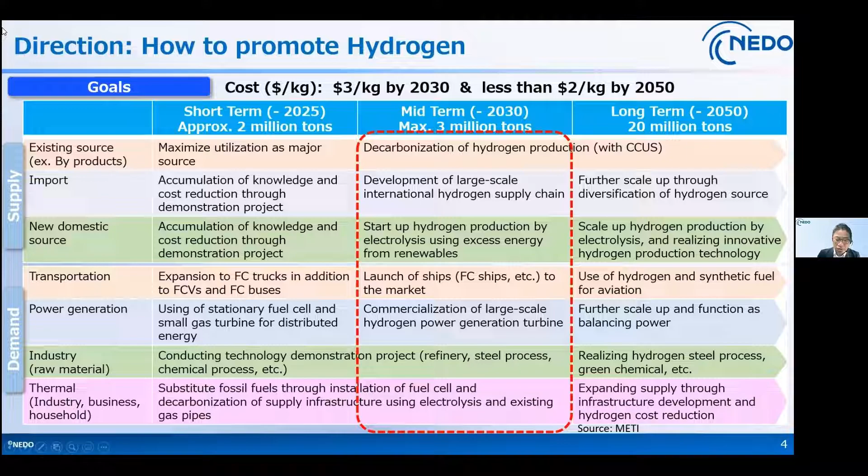Let me talk about the current status of hydrogen fuel application. Our first commercial application is a stationary residential fuel cell, namely Ene-Farm. It was launched almost 10 years ago, in 2009. Now we have over 400,000 units around Japan.

In the mobility sector, we already have 6,500 passenger vehicles, mainly Toyota Mirai, and fuel cell buses running regularly, mainly in the Tokyo city area, with over 100 buses. The public hydrogen filling station is key for the dissemination of fuel cell mobility. Now we have 160 hydrogen filling stations in operation.

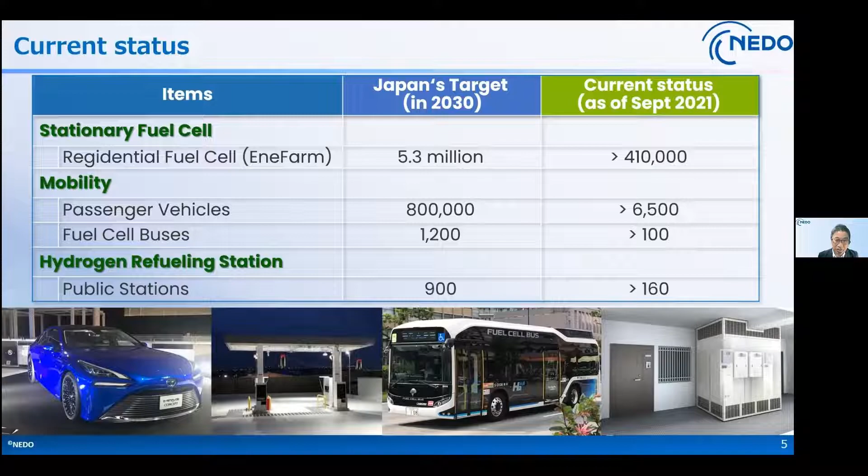Next, let me talk about NEDO's activities. As I mentioned earlier, we organized several national projects, including hydrogen fuel cells. We're working on hydrogen production, storage, transport, and utilization, covering basic research, applied research, and demonstration, etc. Now there's hydrogen and fuel cell technology, and hydrogen production, etc.

This shows our strategy, a step-by-step approach. Right now we're working to commercialize the residential fuel cell, bringing fuel cell application into the market. As I mentioned, we succeeded in commercialization in 2009.

The next step is realizing the fuel cell vehicle and the hydrogen filling station. The fuel cell vehicle provides a good environmental option, but the most important thing about this application is direct use of hydrogen as an energy source in society. We need to develop not only technology but also social systems, including regulation codes and standards. We succeeded at commercialization in 2014, as you know.

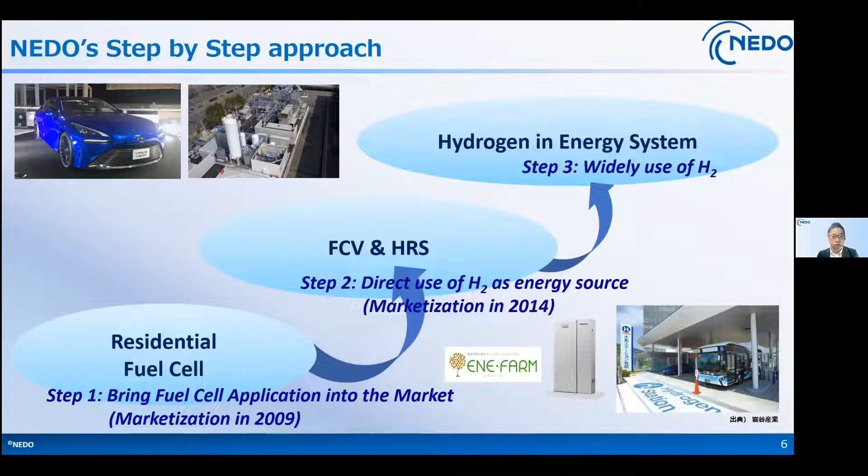Let me talk about a snapshot of a recent project. This shows our efforts on hydrogen gas turbines. We may use hydrogen instead of liquefied natural gas for power generation. We're working with small-size hydrogen gas turbines and then scaling to large scale.

Using hydrogen and natural gas, we try to expand the size of the hydrogen gas turbine, and as I mentioned, realize it by 2030.

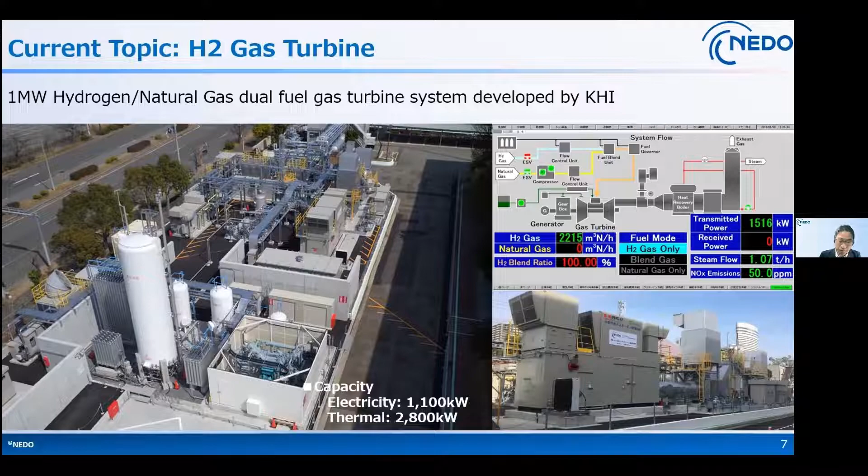Japan needs to import hydrogen in the future. The challenge is how to concentrate hydrogen for long-distance transportation. One choice is liquefied hydrogen. We've already developed a small but world-first hydrogen tanker, and also liquefied hydrogen handling equipment at port. We continue working on demonstration, and we're investing a huge amount of money in scaling up this liquid hydrogen, or other hydrogen carrier, for international transportation.

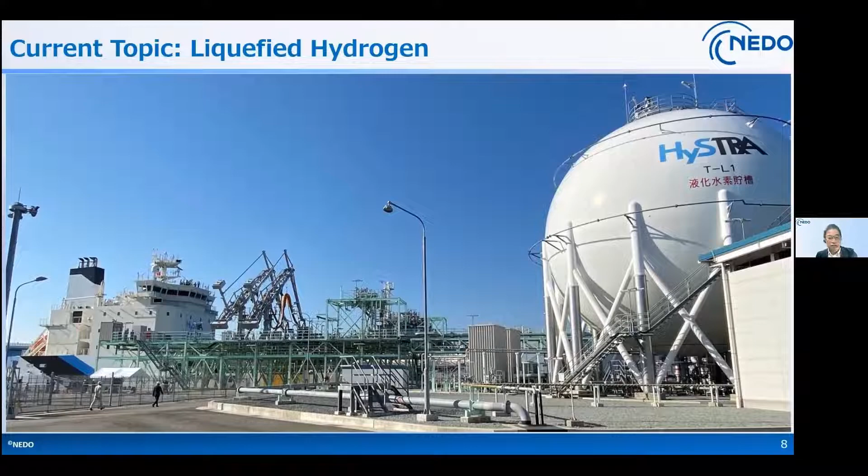Power to gas is also quite important for realizing a green-based energy system. Electrolysis is a key technology here.

Japan is conducting megawatt-scale power-to-gas projects in two areas. One is in Fukushima Prefecture, in the very northern part of Japan, based on Asahi Kasei's 10 megawatt alkaline water electrolysis. The other one is in Yamanashi Prefecture, the center of Japan, with 1.5 to 2 megawatt PEM water electrolysis developed by Hitachi Zosen Corporation, using a high-efficiency hydrocarbon membrane technology. We will continue the demonstration, and the next step is scaling up to 100 megawatt plus within several years.

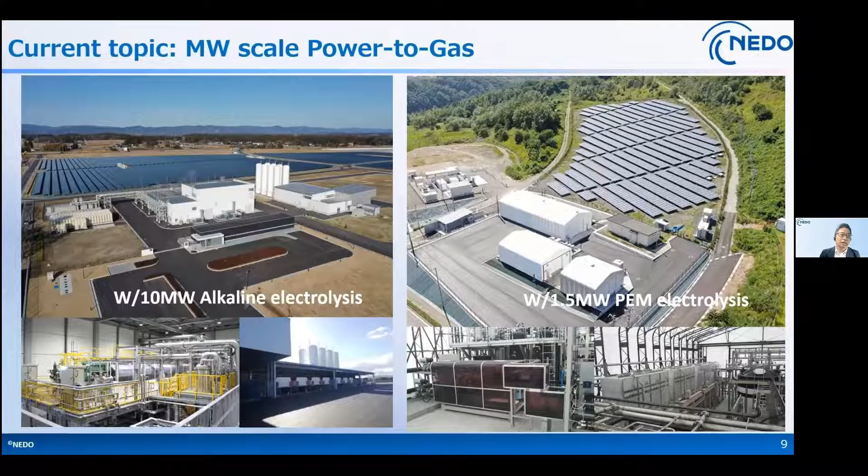Lastly, let me talk about our demonstration project at port. We try to develop a localized hydrogen utilization model. This figure is an overview of our current effort at the port in Los Angeles, California. From the viewpoint of air pollution control, electrification of port equipment became an important issue.

Battery is one option, but hydrogen is the most promising option for implementation of electrification at port. We try to develop several hydrogen applications, like top handler cargo cranes and drayage trucks, installing and testing their usability at the port.

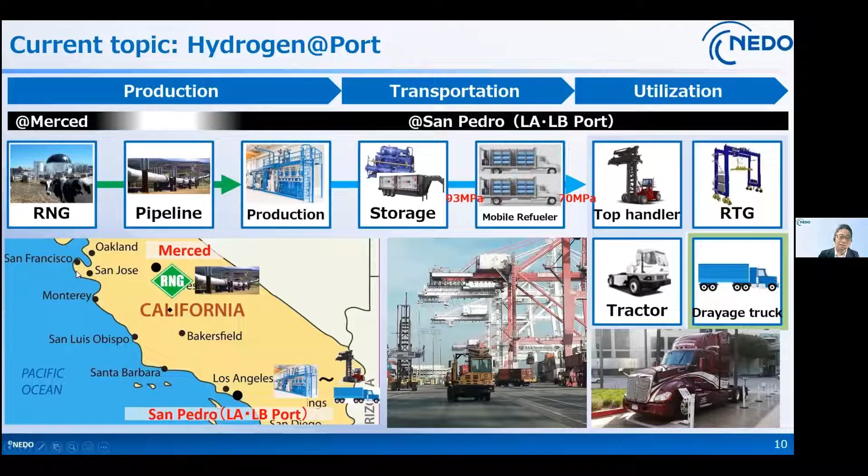So, let me conclude my presentation. Hydrogen is not a single solution, but a key technology for carbon neutrality. Japan has become strongly promoting hydrogen, and we continue to expand our effort. We just started market penetration on hydrogen fuel applications, but we need to expand applications and improve the technology itself. Our goal is not only to disseminate fuel applications, but also to develop a low carbon energy system. We're working on several approaches, but the key work is scaling up for integration with other energy systems. Japan is working on hydrogen very hard, including collaboration with other countries. Thank you very much for your attention.